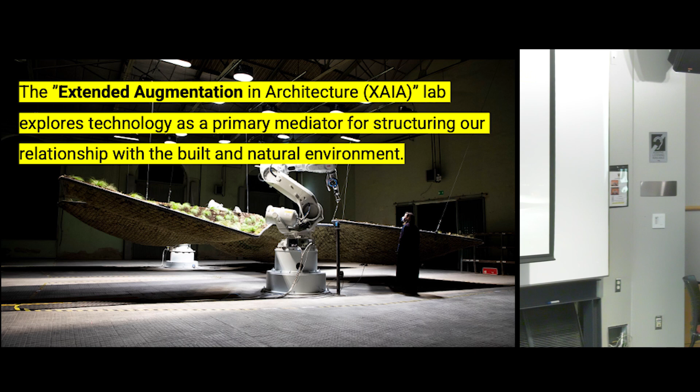Since a few months we found the name of the lab, it's the Extended Augmentation Lab in architecture, and our aim is to explore technology as a primary mediator for structuring our relationship with the built and natural environment. In the background you can see one of the works I'm doing with my practice in Innsbruck, Austria, where we mostly focus on large-scale garden installations with robotics. I won't show that work this time. There we explore a lot of the research we do in academia in a more artistic context and a broader context without the strict boundaries of academia, I always say.

This is my team. Two of my PhD students are here today. I also supervise, co-supervise, and have collaborators still in Europe at ETH Zurich and TU Munich that we continue to work with, also on a more global scale.

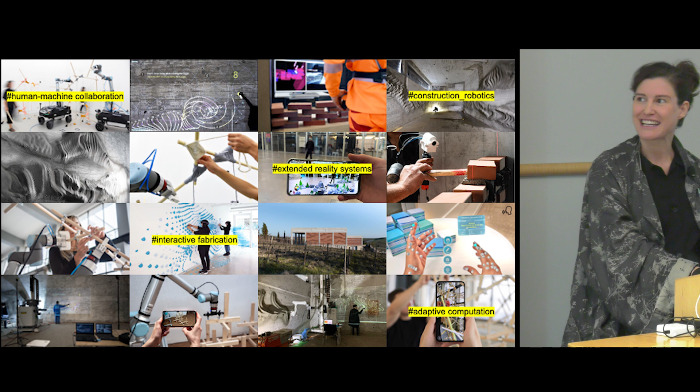Good, let's get it started. So what is my work about? My research includes domains such as human-machine collaboration, construction robotics, interactive fabrication, adaptive computation, and extended reality systems.

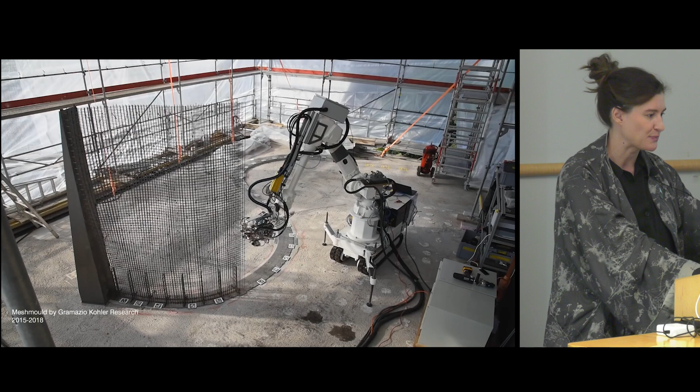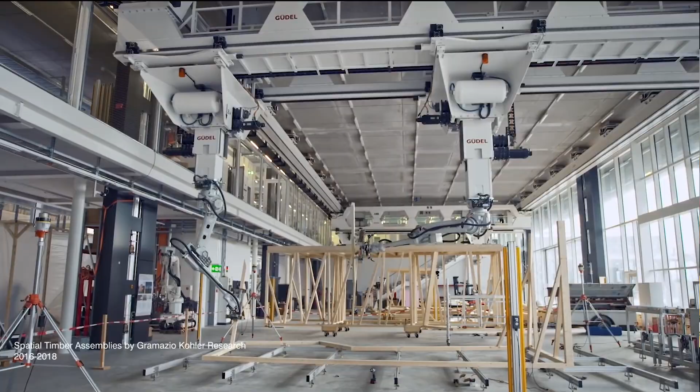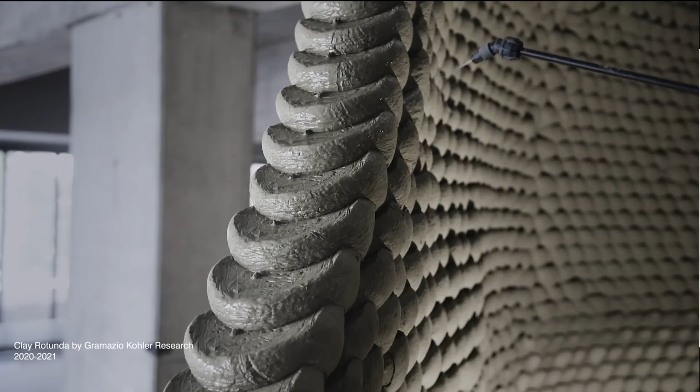Why is that important in architecture? In architecture, we've had digital and robotic fabrication for around 12 years now, and it brought us a lot of great things. It brought us the ability to build more custom, complex, precise structures. Compared to manual fabrication, machines are very good at repetitive tasks, lifting heavy loads, and providing high precision, as you all know from working with robots.

But if we look especially at construction robotics or large-scale robotics, most robotic construction processes are feed-forward and aim for full automation. So for the last 12 years in architecture, everyone aimed for full automation. But of course, full automation in architecture is based on well-defined linear sequences of actions, where the work environment, materials, and processes have to stay constant. This, of course, brings a lot of limitations with it.

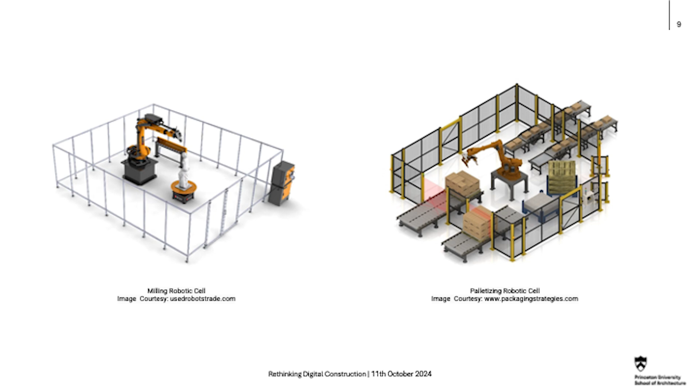This slide shows these limitations. Full automation almost requires something like this, especially when we talk about large-scale robots that are not made to work in close proximity with humans. And if we take a look at what happens in architecture, we see we break these rules quite constantly.

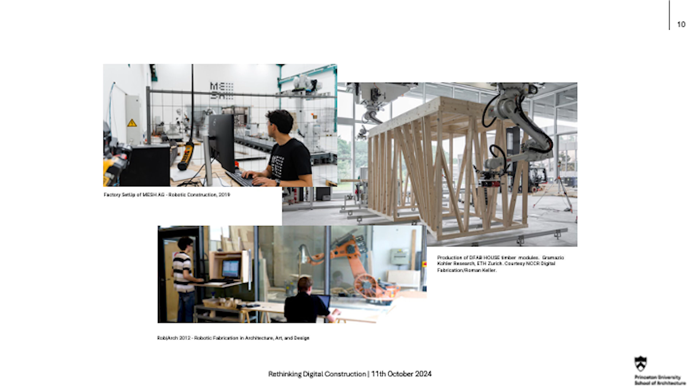The reason for that is, if we look at what we use robotics for in architecture, a lot of the processes we work with are unpredictable, inaccurate, complex, and involve materials with nonlinear behavior, such as, for instance, mortar. It's especially these characteristics that make these processes very difficult to automate, and why most of them still rely a lot on manual labor.

So we humans are very good at reacting quickly and improvising in complex situations. Due to that, we have something called tacit knowledge, we have context awareness, we are dexterous, and we are very good at working with something like mortar.

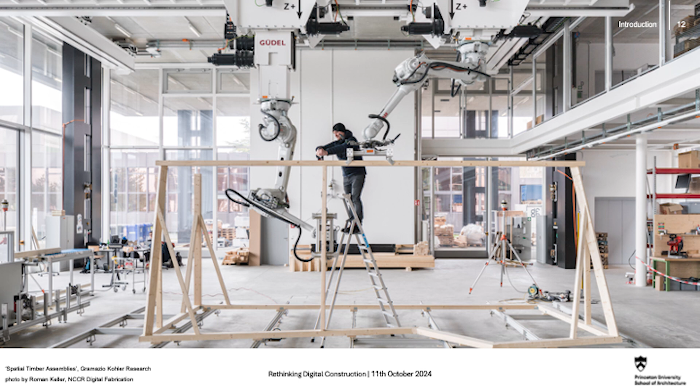And this is also the reason why, when we see robotics in architecture, we always still see a human in the picture. For a long time, these pictures were not shown at conferences or things like this, because it was seen as something that is weakening the project. Actually, humans were and are still very necessary to assist the shortcomings of robotic fabrication in architecture.

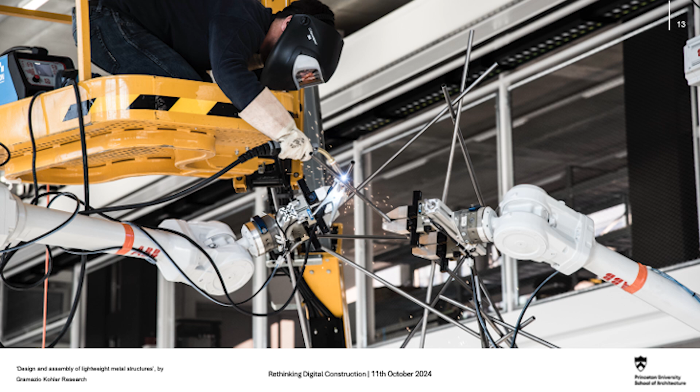Which is, in my opinion, a good thing, because it's okay to say that we humans can do something that robots cannot do. The real problem comes when we see that human actions, like for instance welding the joints, are not included into the digital control logic. That means human interaction—and we have a lot of it if we look at all the possible interactions that are out there—is not instructed and not included, cannot be controlled, and cannot be told to other people if a task was finished or how a task should be done.

So now the question is, if for the last 12 years we've done robotics, how come no one actually started to research this? It's really a research field that started when I began at ETH Zurich four or five years ago. And there are three main reasons.

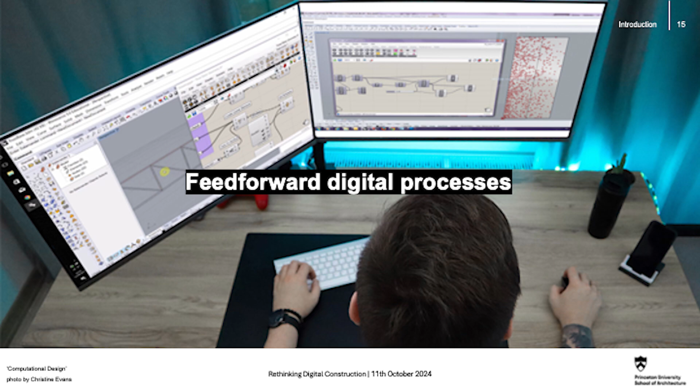The first main reason is most of our digital fabrication processes are feed-forward, meaning there's no synchronization between the computational model and the physical environment. The second big reason is that there's a very inflexible distribution of tasks—either a human is making it or a robot is making it.

But if we look at reality, things change. If we look at construction sites, parameters change. So we need to have a more flexible task distribution.

And third, very importantly, we lack a lot of human interaction capabilities. So that means we lack tracking systems and user interfaces to inform and instruct humans about fabrication tasks, and include especially their decisions and intentions back into the computational framework. So actually give them more adaptability and more freedom to move within a computational network instead of limiting the freedom.

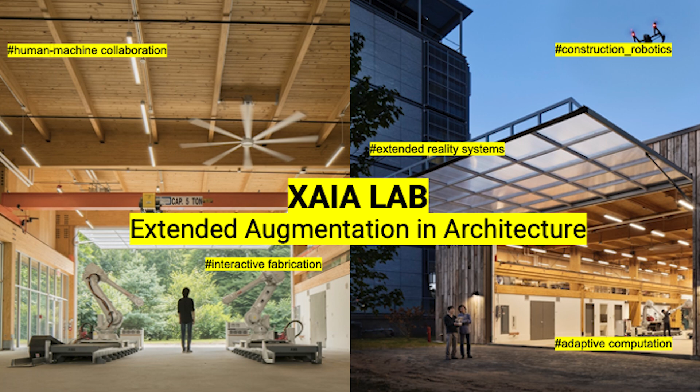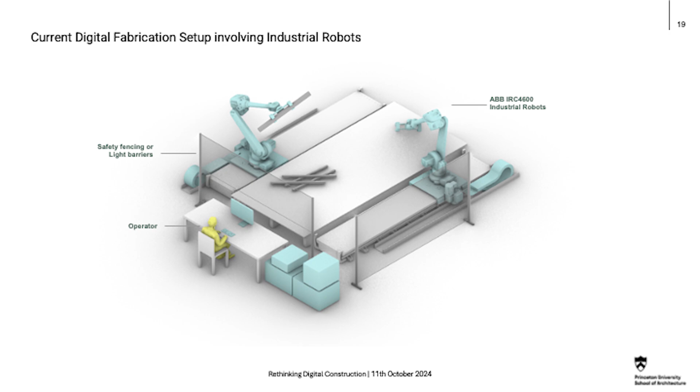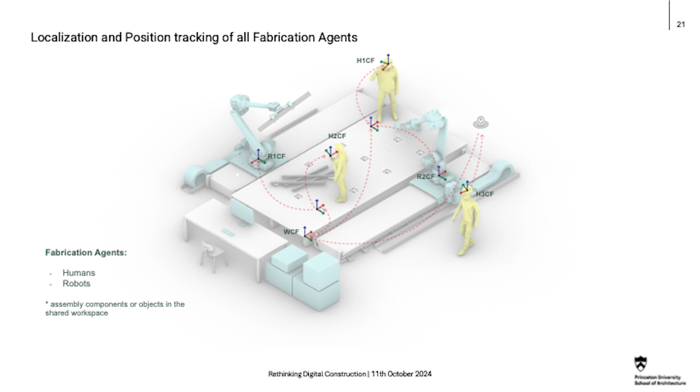This is actually what we are researching now at XAIA Lab in architecture, to extend what we are used to, which is looking something like this: a human sitting behind glass walls cannot interact with a robot on time intuitively, to something like this, where we can say that humans and robots are sharing the workspace, which of course sounds nice, but brings a lot of complexities. Because suddenly you have a lot of moving actors and agents and a lot of intersections of workspaces. So we really see the need for that.

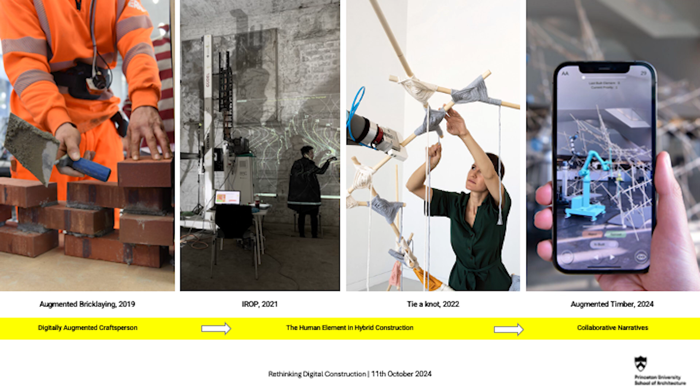And I want to show 4 projects that kind of tackle the individual things that I just mentioned, with intuitive interfaces, intuitive interactions, and potential computational models that we have, and user interfaces to allow humans to interact with a machine on the fly. So I will start with a project that does not include robots.

I'm sorry about that, but this was actually the first one that I started to work on that showed me the importance on why we should not just only augment the human. Because originally everyone said, okay, but why do you need the robot? Maybe we went all the way the wrong direction. We don't need construction robotics.

And it was a project that I started in 2018 actually, end of 2018. It was my PhD project on augmented bricklaying. And it is up until now still the largest building built with augmented reality. I was using visual inertial object tracking algorithm in collaboration with Timothy Sandy and Katrin Dörfler. And in total, we built 14,000 individual bricks in Greece.

And it actually gave me, even though there were no robots involved, it gave me a lot of knowledge on why and what we need to include a human in the computational logic.

This was kind of the setup that we had. So we said, okay, a human is placing the bricks. We're using object tracking, or visual inertial object tracking, to detect bricks in space. We need a computational context-aware software that allows us to know where a brick is and where it should go. And I call it augmented reality. We did use screen-based augmented reality. I will also explain in a second why.

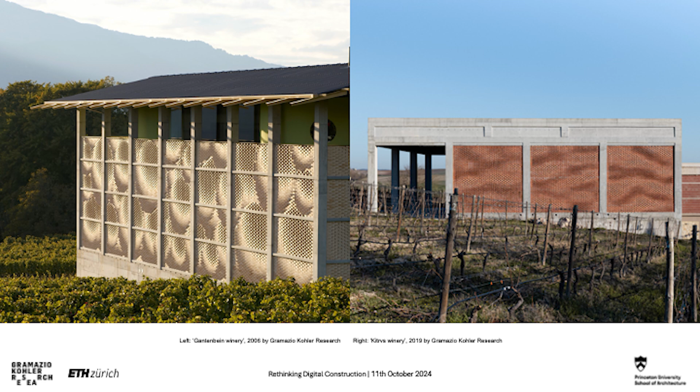And it started with, so this was actually a building built by Gramazio Kohler in, I think, 2006. So it was the first building built with robots. They laid all the bricks with robots.

And we had a client coming in to ETH and say, they want exactly the same thing. And then I just started my PhD, and they asked me, isn't there something else we could do that is not a repetition of research? And I said, well, there are 3 ways you can place complex brick walls.

The first one is pure manual fabrication, so you have physical templates and guiding systems. But it's very time-consuming, it's very expensive. Of course, we can place it with robots. But there are problems with robotic fabrication. For instance, there are limitations for on-site use, and you have problems when you use materials such as mortar. You have problems if you use materials such as handmade bricks. So third, we have augmented fabrication, which actually has the potential to combine human dexterity with the geometric precision of machines. And this is how I started.

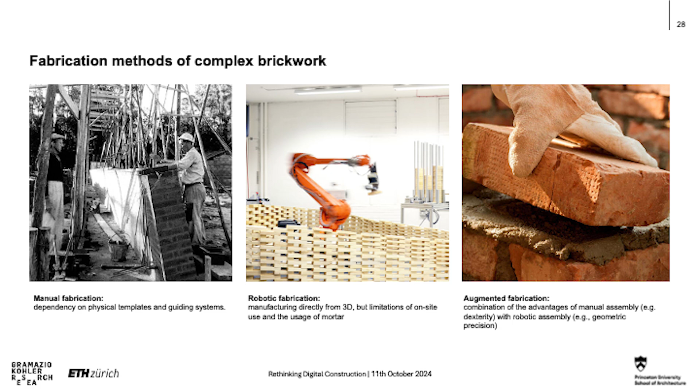I said, okay, let's go for augmented fabrication. They put a trust in that, and they said, okay, you have 1 year to do research and 3 months to build the building.

So I started to do the research on what is necessary, and to build with augmented fabrication, I needed to be able to inform humans on where and how to assemble complex brick walls. So for this, I tracked the position of bricks in space using visual inertial object tracking and combined it with current CAD models and a craft-specific user interface.

Why is that necessary? Because, of course, we still work with architects. They have their own work environment, which for us is mostly Rhino and Grasshopper with Python and an open source library called COMPAS. And we needed a craft-specific user interface because we were working in Greece. I don't speak Greek, so I needed to find something that allows bricklayers to intuitively understand what they have to do for a task that sounds banal, but it's actually quite difficult, how to rotate an object 3-dimensionally to reach a specific position.

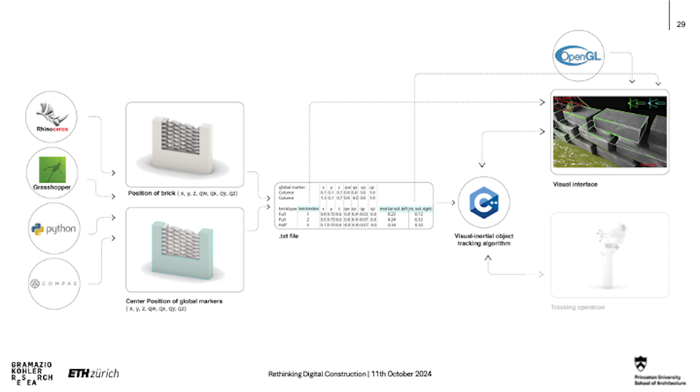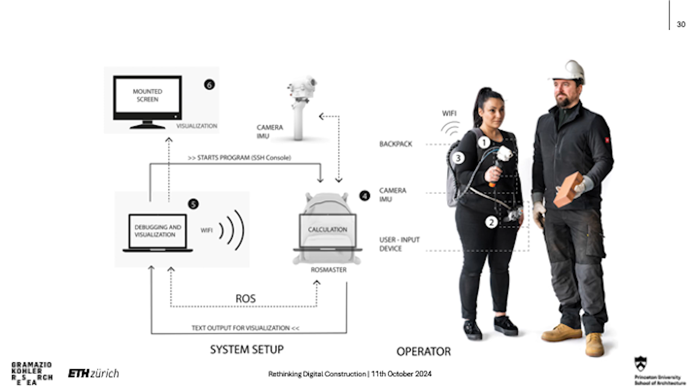And also because it was an actual building project, I was researching on how to do it physically in space. What's the hardware setup that we need? How can we actually produce something like this? So the whole system was made portable and combined with a screen-based augmented reality system. And this is what we shipped to Greece with some knowledge in me.

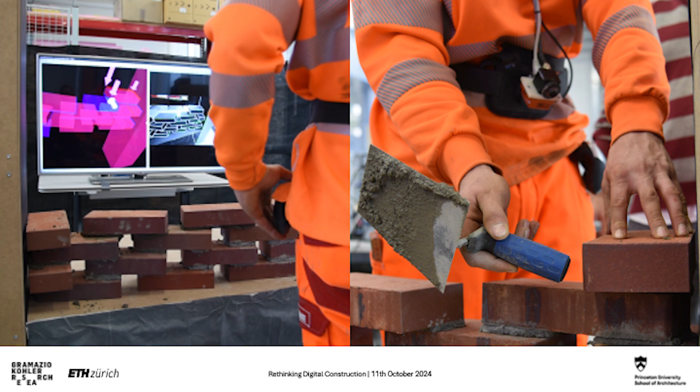And one of the hardest parts was to develop this craft-specific user interface. That means informing masons on how to assemble brick walls intuitively.

I worked closely with masons, and I laid all the other bricks where you see the fingerprints on it. Then the bricklayer came in and didn't leave a single fingerprint. I realized it's because they are tapping the bricks with their trowels.

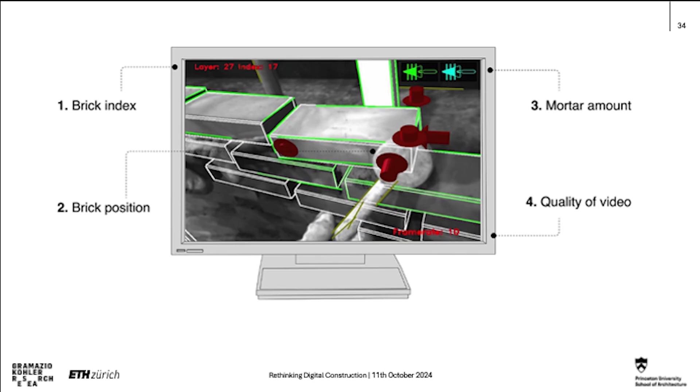I started to understand how they see 3-dimensional rotation is not how we do it when we are used to working in 3D software. They see it in 2D movements to reach a specific position. I started to understand that this is what I had to include into the user interface for them to start to understand what they already know in a faster way.

So I just translated the position of where the brick is currently to where the brick should go, and they saw specific arrows with a length. The length and position of the arrow showed the bricklayers where to hit the brick and with what strength. Once they hit it correctly, the arrow disappears.

Also, I showed them the mortar amount, just as symbols, because I cannot tell them something precise. They start to measure, it takes too much time. So I just showed them how much they have to fill their tool to actually reach the amount of mortar on the left and right side.

Here you can see an example where it was detecting the current position of the brick, and on the right side you can see the arrows that inform the bricklayer where to hit it. You see that we were using an edge detection algorithm.

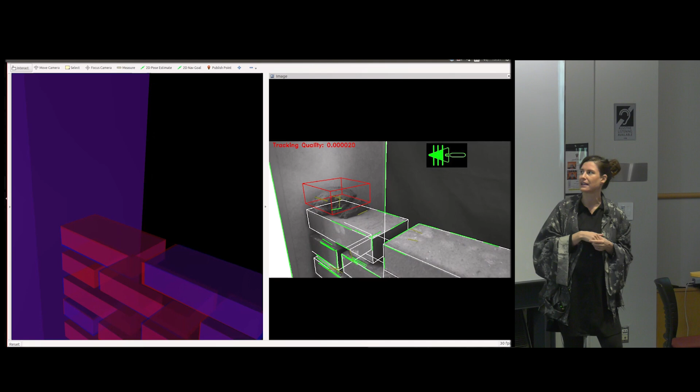Back then, we still had it separated in two distinct interfaces. At the end, we overlapped it. Here you can also see how much mortar they actually could remove, so that the algorithm actually worked quite well to see even some noise, and the real-time update of the arrows on the left side.

And we translated that to what they saw on site. We overlapped it, so we didn't have two interfaces anymore. We just showed them one interface that included everything.

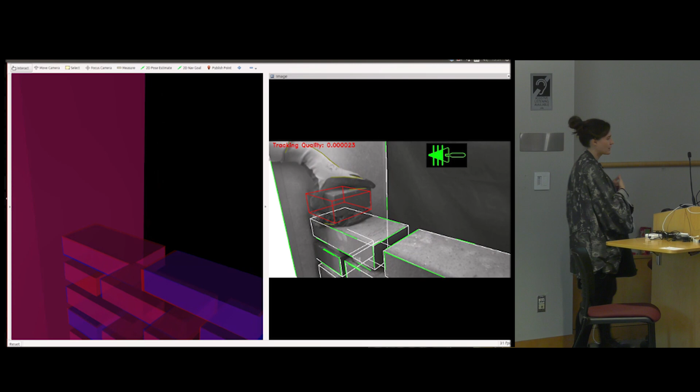And that's how the bricklayers worked. We had it split in two people. The reason for that was...

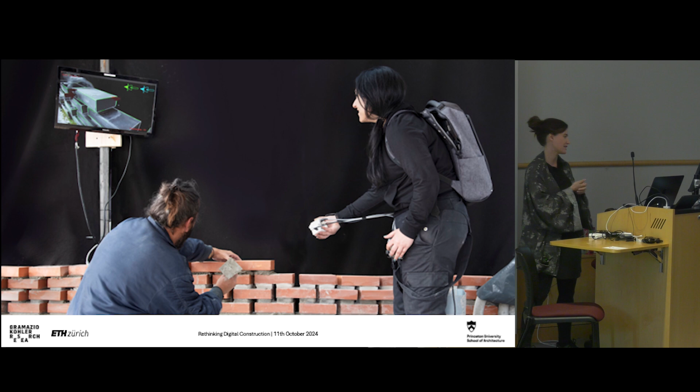We were tracking everything with an IMU and a camera system. And we were trying to place it on the human, but because hands are always in front of the camera, we actually were splitting it into two people. So one person was just responsible for tracking the objects, and the other person was responsible for adjusting the bricks.

And here you can see the design that I was creating for augmented bricklaying. It was the entire facade of these 14,000 bricks. And the whole idea was that it's something you could not see just by eye. So you only see it after you finish an entire wall.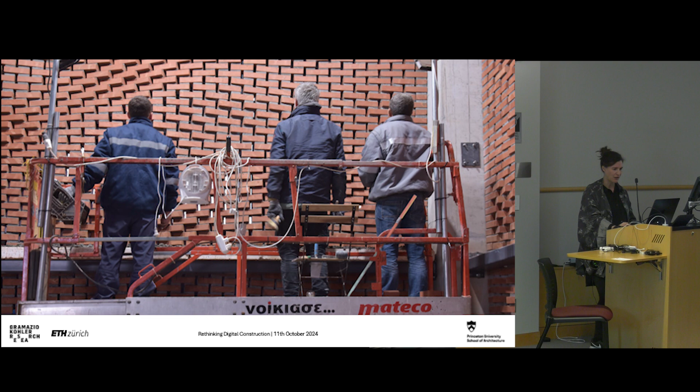Some pictures here on how the walls actually looked like at the end, and how the bricklayers were placing it. Here you can see actually my PhD student now, she was already part of that project, placing the bricks with the masons.

Part of the user interface and the final brick. Of course, not this one, as you can see, but this one was the part that we were developing.

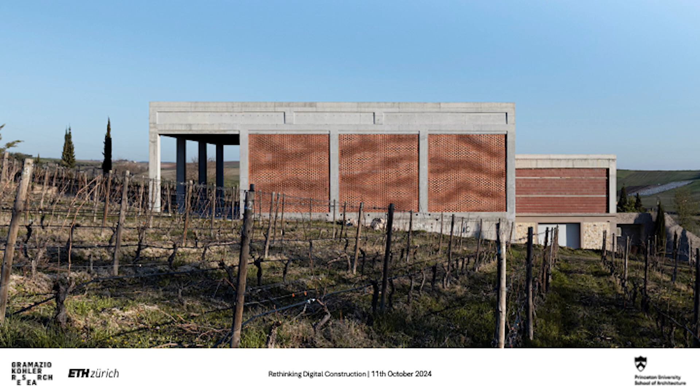You can see some video snippets from the construction site itself. So in the end, we split it into multiple teams that were wearing two different setups, two separate setups.

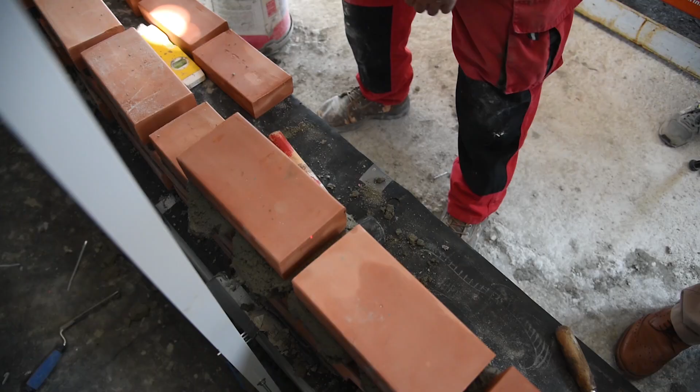And once the bricklayers actually started using the system more often, they could use it alone. So only in the beginning did they have to be like multiple people.

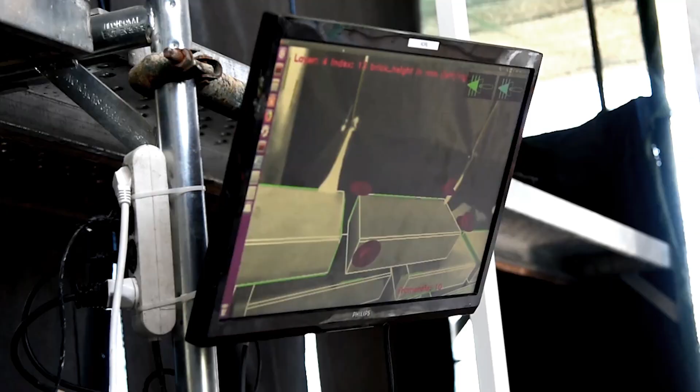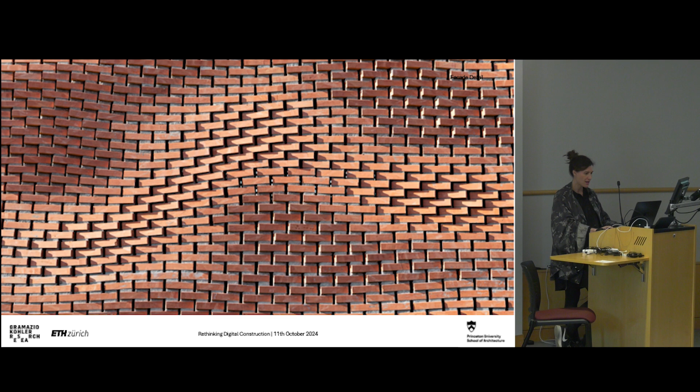So we managed to finish everything in 3 months under outdoor conditions in Greece. We had summer, bright sunlight, and managed to finish everything on time. And here you can see some pictures of the elements.

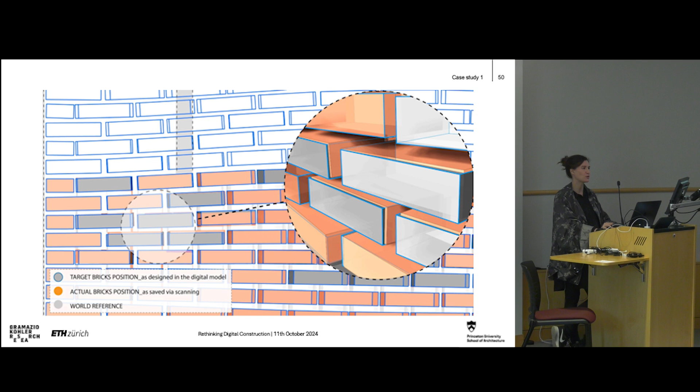Here you can see the learning curve that bricklayers had. In the beginning, I tested these parameters—what if we try to be 2 millimeters precise? Because we have this imprecision of architecture and construction, you cannot be too precise. You need to find the sweet spot of precision and time. In the end, we managed that each brick took around 3 minutes, which is approximately the same time as for a straight fair-faced facade a bricklayer would take. Here are some examples of that.

Why I always like to show this project first is it showed me there are two things I need to include in a digital model. First, I need to include human intentions—I need to understand what the human wants to do. Second, I need to include where objects are or where humans are in the control logic. And third, I don't like to lay bricks. I had to lay a lot of bricks for this research project, and I realized I don't want to do that, and I don't think humans want to lay 14,000 bricks.

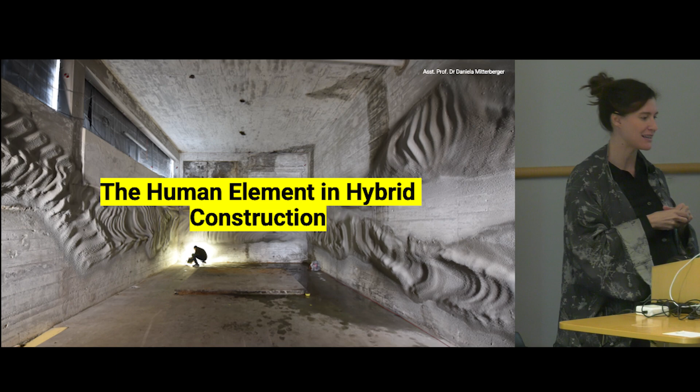But I also realized what I want to do: I want to lay the one brick that makes a decision. I want to place something that actually changes something in the design or corrects something. So I want to give the input and not do the entire physical labor. This just shows me that we need this human element in hybrid construction.

So I went on to a next project, called interactive robotic plastering, which combined an augmented interactive design and fabrication system with a robotic plastering process. Here too, it was a construction period of 3 weeks, where we designed and fabricated on-site without a predefined model. It was the first time we had a combination of a plastering process with an interactive fabrication setup. So here I switched to asking: what if the human doesn't produce at all anymore, and you only have the machine?

We have a projector for the augmented reality interface, and not only do we have a computational model, but it's also interactive—meaning there is no 3D model before we start fabricating. If any of you ever did some 3D printing, you know you have to finish your design before you send it to the machine, which is great if everything works out, but once you have a problem, it costs you a lot of time. So what do we have to do to create digital models that allow you to change them on the fly during fabrication?

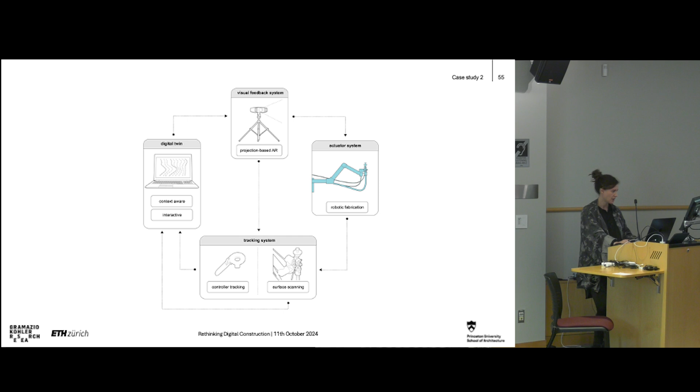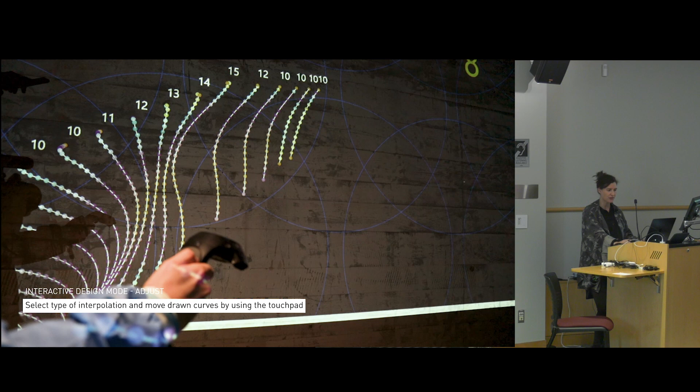For that, I combined 3 parts: an interactive design setup, an augmented reality system, and a robotic plastering setup. For IROP—the short name for that project—we used a controller-based interaction system to enable humans to interactively design and fabricate articulated plasterwork in situ, taking the building structure and the as-built state of the ongoing fabrication into consideration for the next phase. It also allowed humans to create complex digital models in minutes and rapidly generate multiple design alternatives, and it allows humans with limited programming skills to instruct a robot by demonstration.

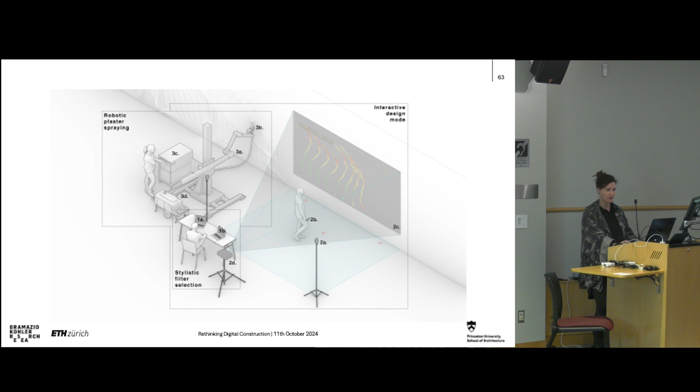The system architecture of IROP consisted of a computational setup allowing users to choose a style—I'll explain what I mean by that—a user interaction tracking setup with projection mapping for the interactive design mode, and a robotic fabrication setup for plaster spraying. The software of IROP had 3 different key modes. The first was that humans could define an aesthetic style of the plasterwork. What do I mean by that? If architects design a building, we design it, it's done, we send it to the construction companies.

I was like, well, isn't there maybe a more modern, more interesting, more interactive way we can design? I thought about the idea of style and Photoshop, where you use brushes to change the style of a line that you give. So the idea was a concept similar to Photoshop brushes, where users can use different styles but translate them into 3D space.

So these styles allow humans to translate and remap analog inputs, such as hand movements, into robotic output. The purpose of the style system is to allow creativity while still ensuring that whatever the human is designing interactively still complies with material and machine constraints. So if a craftsperson is going on site, they cannot break the robot, they cannot break when they work with plaster, and they can directly produce something that they like.

An example of such a style system is the carving effect you can see here. It translated the distance of your hand towards the wall you wanted to spray on to a different carving or smooth effect. The reason for that was because we were spraying with air, still distributing the liquid plaster. So the closer you had the nozzle to the surface, the more you had this kind of ripple effect. This was just one example of what you could do with this translation of human input to robotic output.

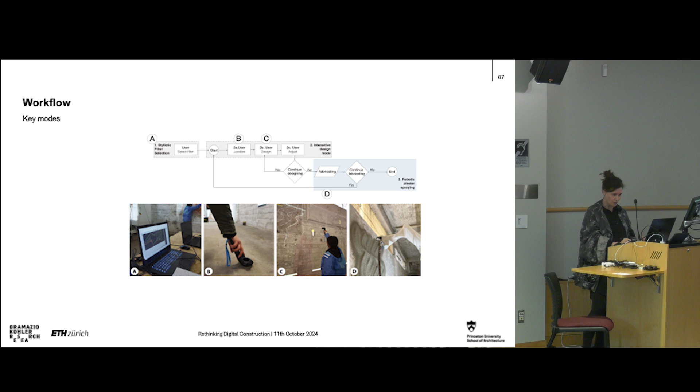The second mode of the software was the interactive design mode. This means the system provided an audiovisual guidance system to instruct humans while they were designing on site. Here you can see a photo of one of my students using the system. One of the reasons this was so important, way more important than we thought, was because purely visual cues are not really working well on construction sites.

So we had to inform humans in the form of voice cues and tones for major events.

Welcome to the construction site. Start of the system. Please mark the points on the ground for localization. Points are marked. Projection is starting. You can now start drawing. They started to draw.

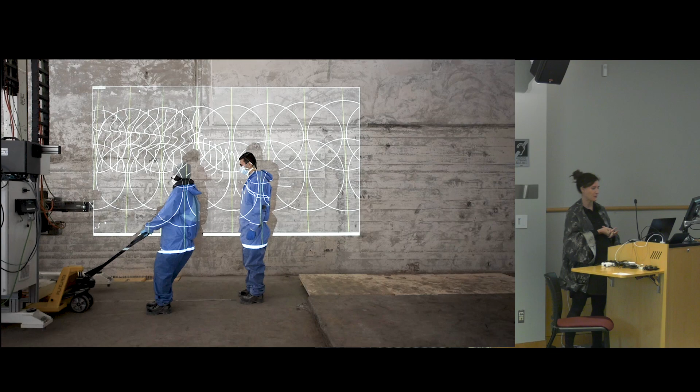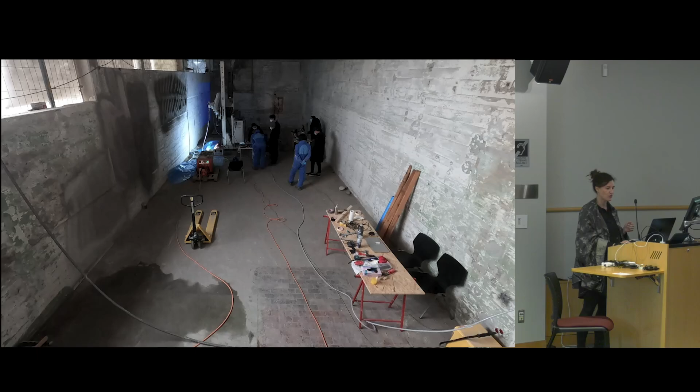To test if something like this would be feasible, I tested two user groups, designers and plasterers, to use the system. The designers were my students at ETH Zurich, who joined the research for a period of two months. They were designing with my software framework their own styles within the computational framework, ranging from very abstract interpretations, like an agent-based filter system, to a hand-drawing filter system which is a one-to-one translation of human motions into robotic motions. They actually picked the middle one, which is in between, to design and fabricate a full-scale architectural prototype over a period of three weeks on an abandoned construction site, using the robotic plaster spraying and the interactive design.

Here you can see some of the pictures of the results, showing that you could use such a system to design and fabricate novel forms of three-dimensional plasterwork on site. There was no 3D model beforehand; everything was designed on site in three weeks and produced in three weeks. The user study with plasterers showed that IRoP was a system they could imagine combining robotic plastering with their own craft knowledge.

But then again, they said, no, but now I cannot produce anything by my hand, so maybe I want to be included a little bit more. So I thought, okay, while augmented bricklaying shows the human being fully instructed by a machine and fabricating, IRoP shows a machine being fully instructed by a human fabricating. So what about the middle ground? What about the combination of both?

And there came Tie a Knot, which examined the combination of manual and machine assembly for complex wooden structures using rope joints. Very similar to the first project I showed, augmented bricklaying, this study included manual human assembly actions into the digital twin, but it extended it with an open-ended design process, an idea coming from the second project, to investigate what the combination of both would make.

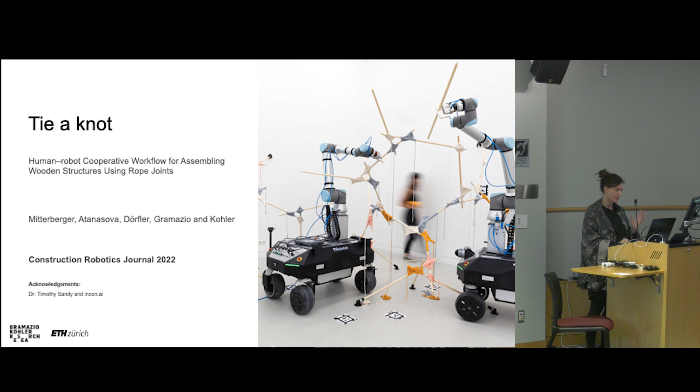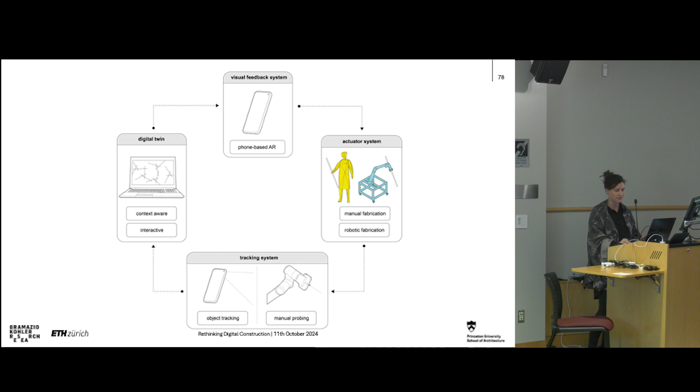So here we have both humans and machines fabricate together. I used phones for an augmented reality interface. I kept the idea of a computational model that is context-aware and interactive. And I used, similar to augmented bricklaying, a visual inertial object tracking system and manual probing with the robot, using the robot as a measurement device for tracking objects in space.

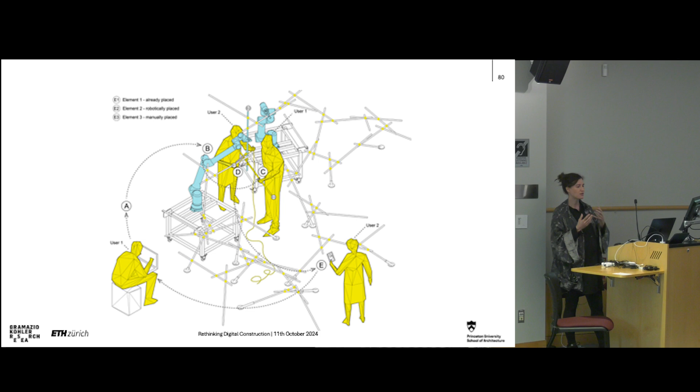So here we investigated how to build complex structures cooperatively. Manually placed elements should not disrupt the digital workflow, but should be integrated into a digital twin and should be able to result in follow-up robotic actions. This means a cooperative assembly workflow that consists of turn-taking tasks between two humans and two robots. The humans could initiate design and assembly cycles that were then continued, assisted, and completed by the cooperating robots. So specific tasks are distributed to humans and others are clearly distributed to the robot.

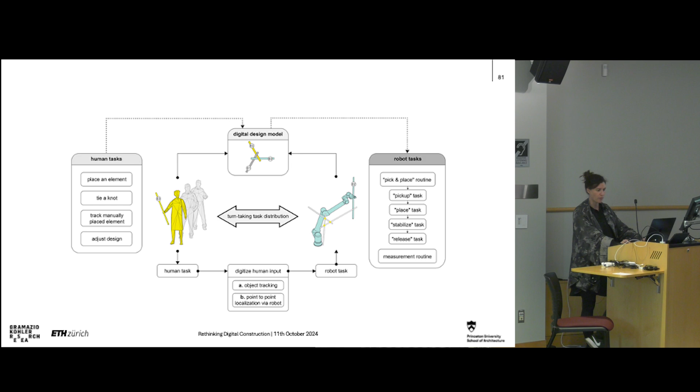We tried hard to find the perfect architectural example of why one task should be distributed to a human while one task should be distributed to a robot. And we found something that we call these Y triplets. Y triplets are made of 3 struts: one from a previous element here in gray, one placed by a machine here in blue, and one placed by a human.

The human one in yellow was distributed because it's actually the hardest one to put in. The blue one can be just placed under or above a previous stick, so it's easy to place with a robot. And the yellow one is actually the one that's more flexible. Sometimes structures move, so this is the one that needs adaptive interaction.

And the whole structure was made of these Y triplets that define the structural logic of the system, which is a reciprocal space frame.

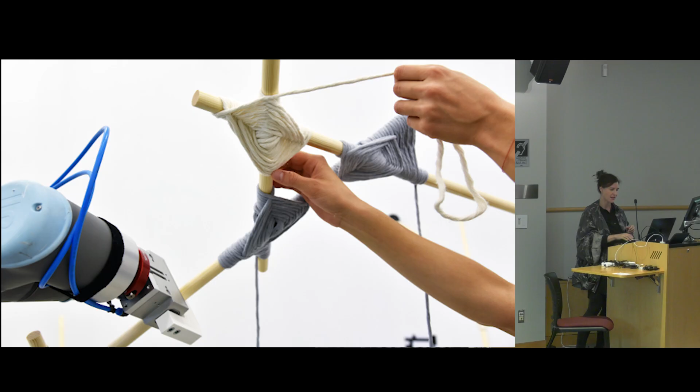To stabilize the structure and connect the struts, I chose a manual rope joint connection to also ask the question: how can we combine manual joints with precise robotic fabrication? This part examined the architectural potentials of cooperative assembly. Everything in this project is difficult if you work with robots—the human is pulling, the human is moving structures, applying force. How can we build a computational model that allows both?

Now I want to quickly guide you through the cooperative assembly logic. We have 5 important steps. The first one is, again, an interactive design. That means humans could decide in which direction a structure should grow throughout fabrication.

Let's say a craftsperson realizes they cannot reach the wall. They can adjust this in small or big portions. That means humans can decide which direction the structure is growing. For that, they had to pick which Y triplet is the starting point for the next one.

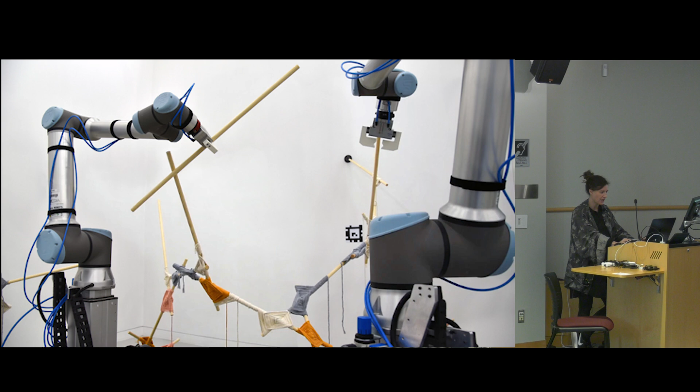After choosing the starting element for the next Y triplet, the second strut was placed by the robot, as you can see here. And the third one was placed manually. Due to the nature of reciprocal space frames, this element is the hardest to fit in, as I explained before, and therefore we placed this to humans.

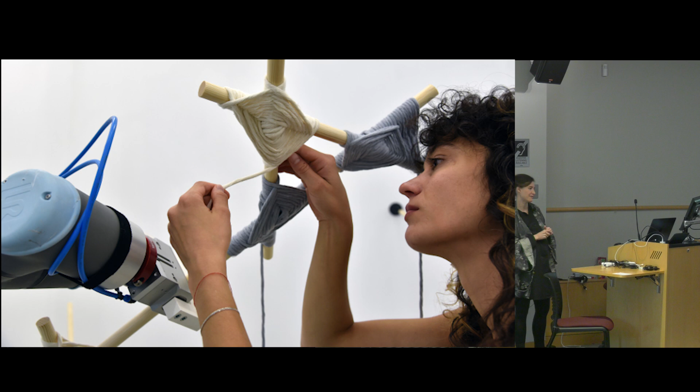After the 3 were placed, the human connected all struts with rope joints. Because the last one was placed by hand, it was not precise enough. So that meant we had to actually read in the position of that stick to allow the robot to have a follow-up placement of the next stick on this specific stick.

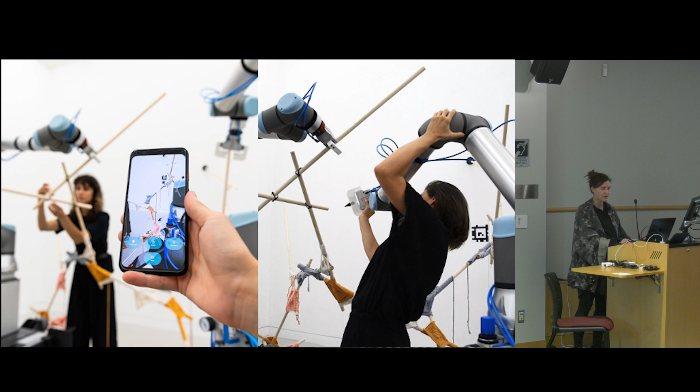So we tested 2 different tracking methods to register these manually placed elements. The first one was, again, a visual inertial object tracking, and the second option was via the robot, where we probed 4 reference points on the strut to define position and rotation of the strut.

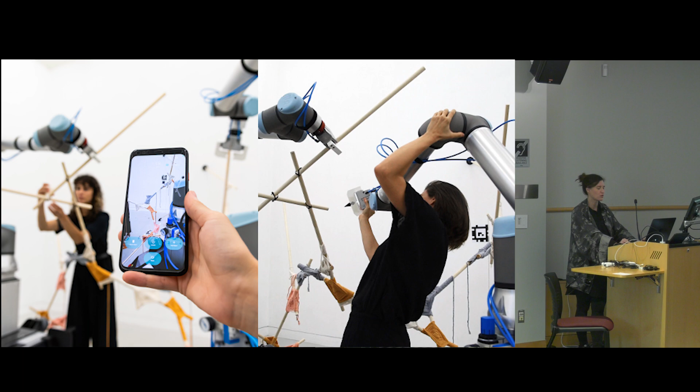We were trying to understand if a robot can be more of a placing instrument, but also a high precision measurement instrument—moving away from the idea of a robot on construction sites purely as these big industrial robots used in car industry, more towards a hands-on tool that the craftsperson could really move and use throughout multiple steps of the fabrication.

So here you can see how we built the proof of concept timber structure. You already see that a lot of the research that we're doing always involves building structures to actually evaluate if something like this is working.

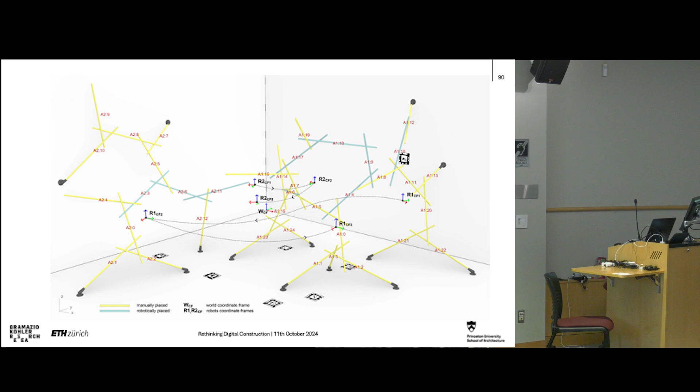So actually this showed us—at first we were like, oh, that's a really bad sign. But then I started to understand that the ones that are difficult to place towards the ground and towards the wall are placed by the human. And the ones in the center, where a robot needs to hold it to give me global accuracy, to give me anchor points, were actually placed by the robot.

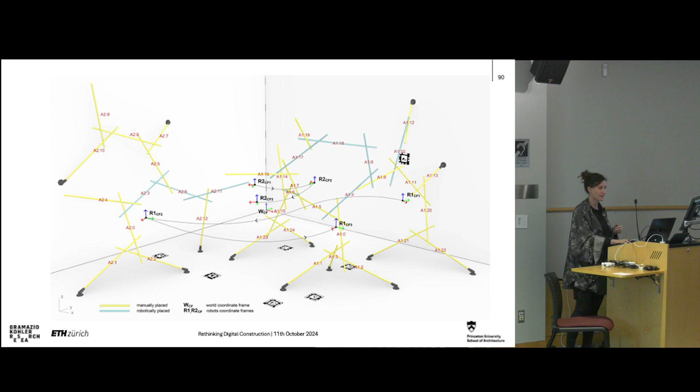This project actually showed that it has a lot of potential, but it also showed the downsides of things. An example is we extended this project with cooperative augmented assembly, the master thesis of Joe and Eleni here in the audience, where the task was to take out some things that made it too complex and investigate other directions.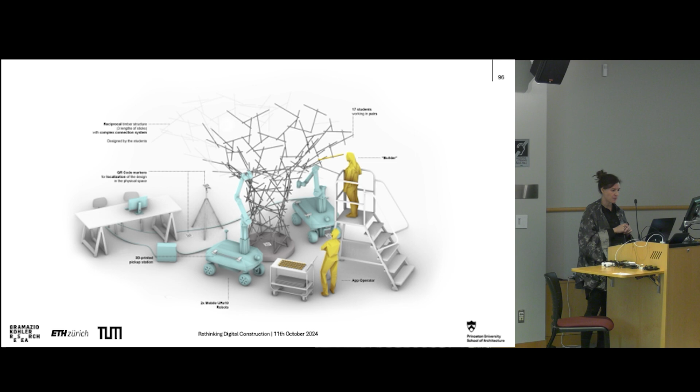In comparison to what I showed before, this project still used robots to hold elements in space and stabilize the structure, which I realized was really important. We extended it to mobile robots because that's important for on-site construction, and started working more on task distribution - clear flexibility on what is placed by a human versus a robot.

We also included structural stability and robot reachability maps into the design generation. Tasks distributed to the robot already included what is reachable by the robot at which position, because what we lacked previously - only placing 9 struts - was that it took a lot of time to place things with a mobile robot. Any move like collision detection and placement takes way longer than a human placing something.

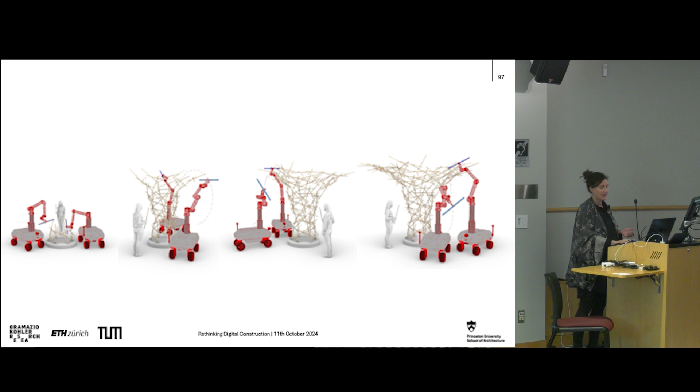Another thing we investigated was what kind of interfaces are needed. With mobile robots, we needed to know where to place one approximately, and to allow humans to instruct a robot. So we developed an interface that allowed humans to see what a robot is doing, predicting movements, but also telling a human what to place manually and the options they have - more direct interaction for distributing tasks between robot and human.

Here you can see examples of the structure we built with two mobile robots, using a phone-based augmented reality app - phone-based because most construction workers have and use a phone. Even though head-mounted displays are great, they're not really used, especially not on-site. Here are examples of what the user could see, predicting the tool path of the robot placing a specific element.

Starting to work on issues such as safety, informing humans on specific positioning and reachability of the robots, and task distribution.

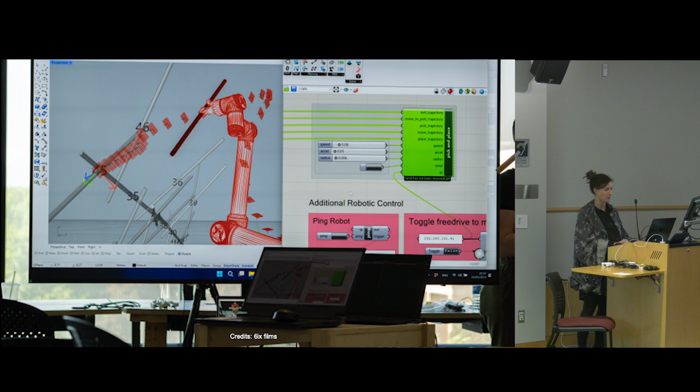Here you can just see some pictures and some videos of how we placed the individual sticks, but you also saw that before. And some of the snapshots of what the user was seeing.

Here we also worked a lot on the idea of how multiple users can access the same app. Let's say you have 4 or 5 people working on a structure. How can they send robotic commands without endangering each other? So we worked on a system that asks for rejection or approval of robotic actions throughout multiple devices. Because the more you add multiple devices, the more difficult it becomes to actually inform everyone in that workspace that a robot is about to move.

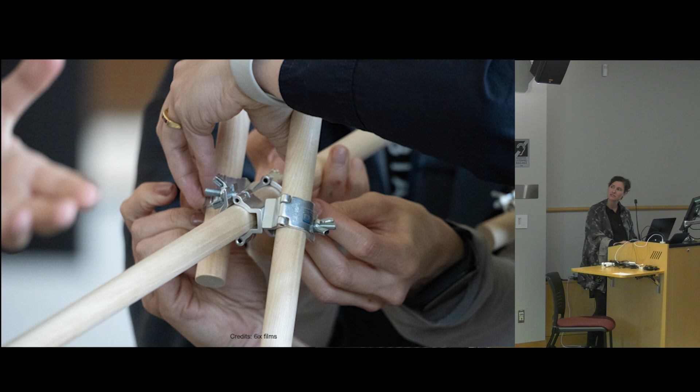A lot of the research went into that direction, while still allowing humans to place something difficult, like the joint connections, using the robot for what it's good at, such as placing and stabilizing objects, to build a structure that is only possible together.

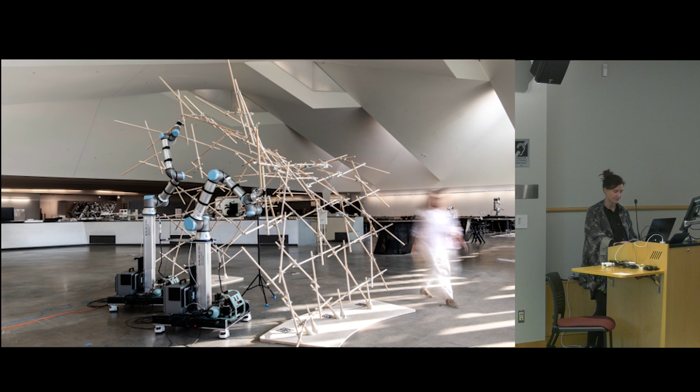I want to end the talk with something I'm very happy we managed to release this summer. Another work that both of my PhD students worked on, and Joe was heavily involved in the writing of the code. All the projects I showed led to COMPAS XR. What is COMPAS XR? It's, in architecture, the first open source framework that tries to combine all the ideas I just told you about in an open source way, to streamline extended reality workflows, to ease the implementation of human-machine collaborative applications in architectural research and educational environments.

It's more than one framework, it's a little bit more complex. So what we developed is 3 main key things: a Python library working in Grasshopper and Rhino to allow you to communicate with cloud services, over cloud services, with AR applications. We developed diverse AR applications that can read in different assembly sequences. For that, we use different kinds of communication protocols, and we implemented them, such as Firebase, MQTT, and ROS.

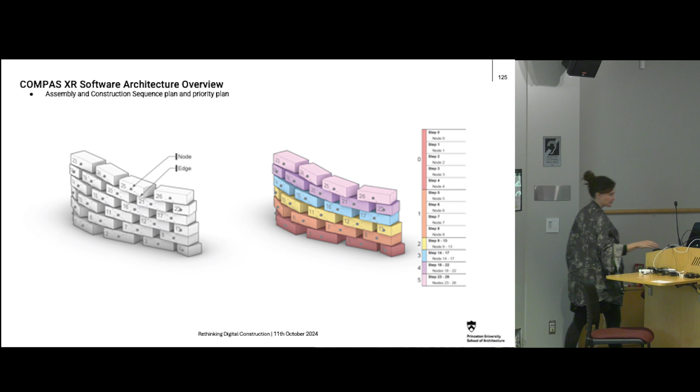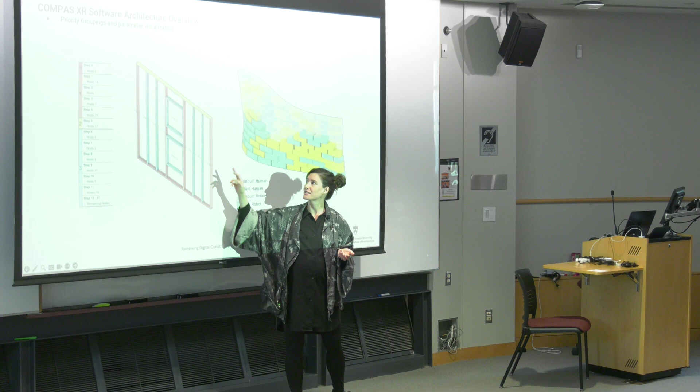Why is that important, for instance, in architecture? Because a wall with timber elements has different priorities of building. You need to place the first ones, the side walls, and the upper one first to actually make the filler ones. It also shows that some of these can be placed at the same time.

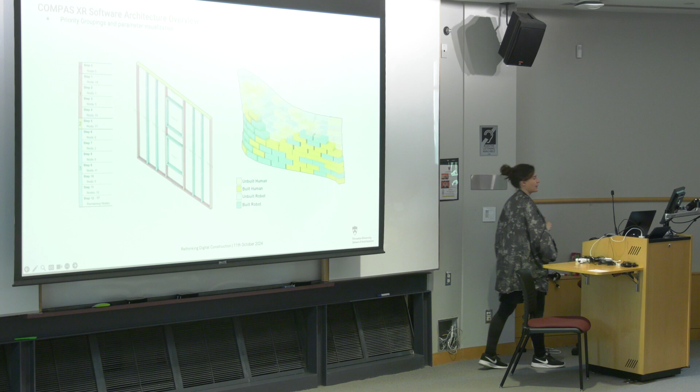So multiple users can place things in one structure in parallel. You're no longer depending on one person leading everything, but instead you have a system that allows multiple users to work in parallel without hierarchy.

It also allows people to preview a structure in AR with specific parameters. For instance, which element should be built by a human, which element should be built by a robot, which one is already built, and which one can I build.

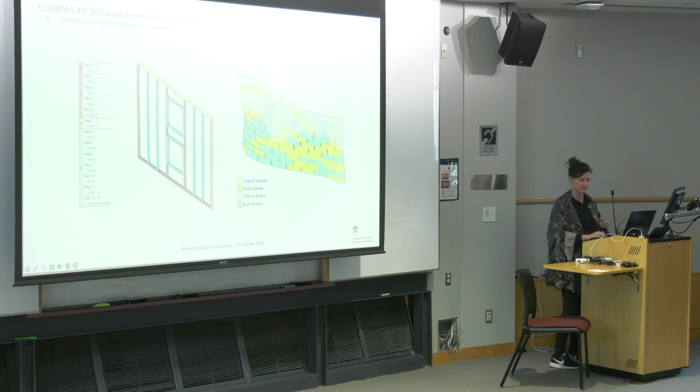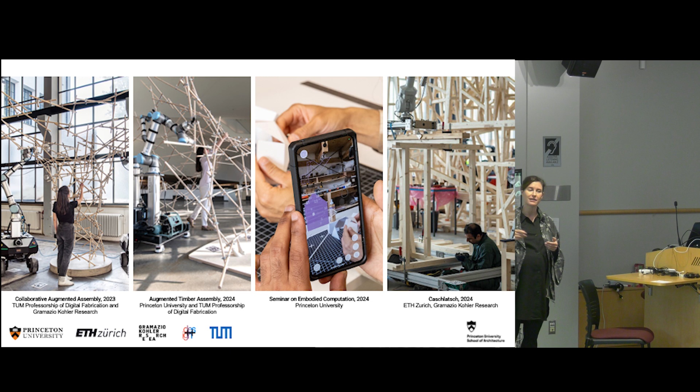It was already used for four case studies, some of which I already showed you. The biggest one just finished in Caschlatsch at ETH Zurich, where they used it for a large timber construction to control robots and humans on site during assembly.

And that's where I end my talk. Thank you very much. I hope I was able to show you a little bit about construction robotics and the tendency where we're going. Again, if you have any questions or want to contact me, please write to me or pass by the lab.

We're always happy to show you our current research. We're just installing a motion tracking system and an upside-down hanging robot. So there's a lot of exciting things happening in the lab, working towards more human-machine interaction. Thank you very much.

Wonderful. Thank you so much, Daniela, for that fascinating talk. All right, any questions? We have a few minutes. Any burning thoughts? All right, great, there you go. Speak to the microphone.

Thank you, Professor. Impressive presentation, I really like your research. I only have one question: what do you think about how to ensure safety when people interact with large-scale construction robots? This question is more related to engineering.